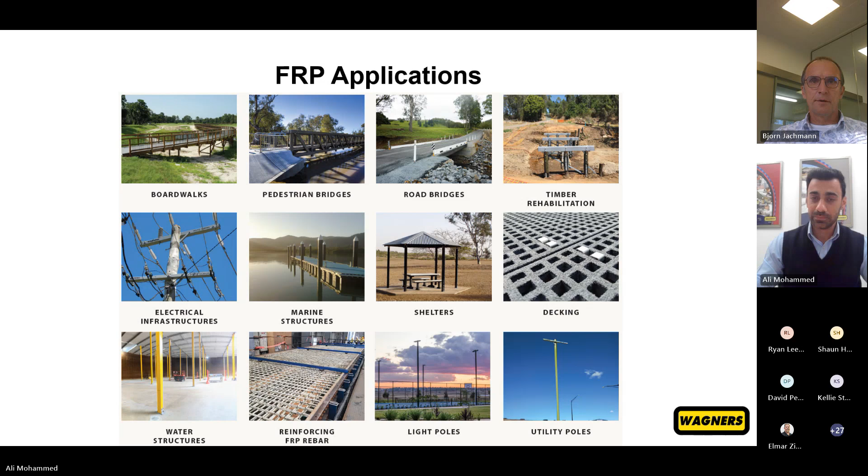When it comes to the design of FRP structures, talking about the design in general, there are two main components for the design: the analysis part and the design part. When it comes to the analysis part, the design inputs are being taken from the local standards. In Australia, taking the loads and design criteria from AS 1170, AS 2156, AS 5100. In the US, the design inputs are being taken from the local codes like AASHTO, and the same thing in Europe.

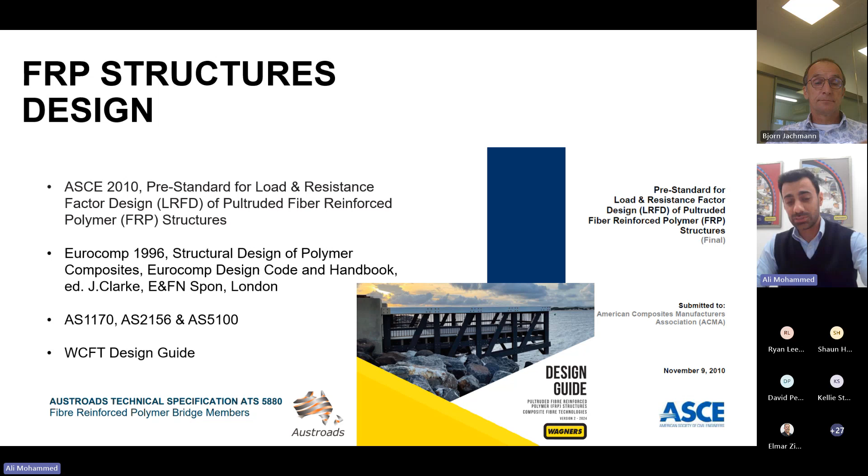These are the analysis inputs. The analysis procedure itself can be done using well-established engineering theories and first principles, like the beam Bernoulli equation theory, or Euler buckling formula, with manual calcs and/or in-house developed spreadsheets, or even using structural analysis software, like for example Space Gass. So all the analysis part is basically what we do for every other design.

The design component of FRP structures is the challenging bit of the design, mainly because there are no Australian standards. However, Engineers Australia basically allows us to refer to international standards if there are no local standards. So the international standards mainly are the Eurocomp and the ASCE LRFD. All of these design codes have been developed for commercially available FRP. And as you know, FRP is basically a very engineered material.

It can vary significantly from one pultruder to another and from one manufacturer to another. So you'll get a wide range of mechanical properties or design aspects. So what has been done here in Australia is we have developed a design guide that specifically covers the design aspects, the mechanical properties, and the structural capacities of the locally manufactured FRP.

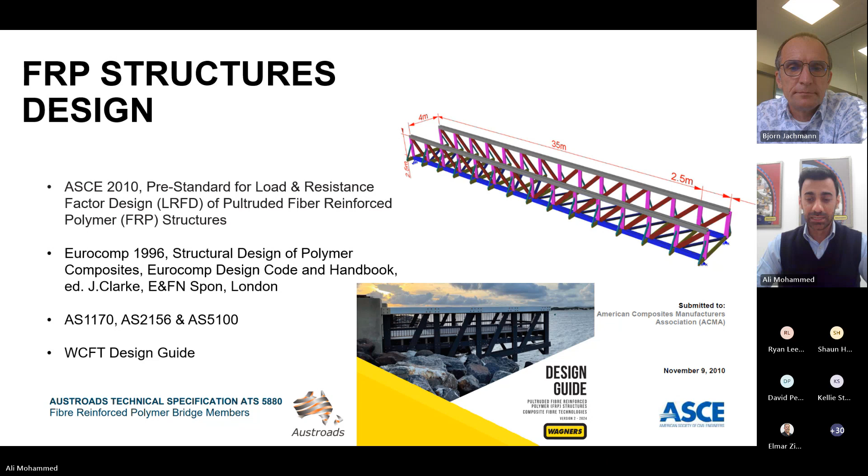So the capacities and values reported in the design guide, as I mentioned, the design guide is being developed in accordance with the international FRP codes and with the Austroads specification. All the actual and experimental capacities are taken from an extensive testing program.

So basically, we have the capacities in the design guide that can be cross-checked with the results we get from the analysis. Your M star can be cross-checked with phi Mu, considering the design reduction factors, and that would be your check for the design.

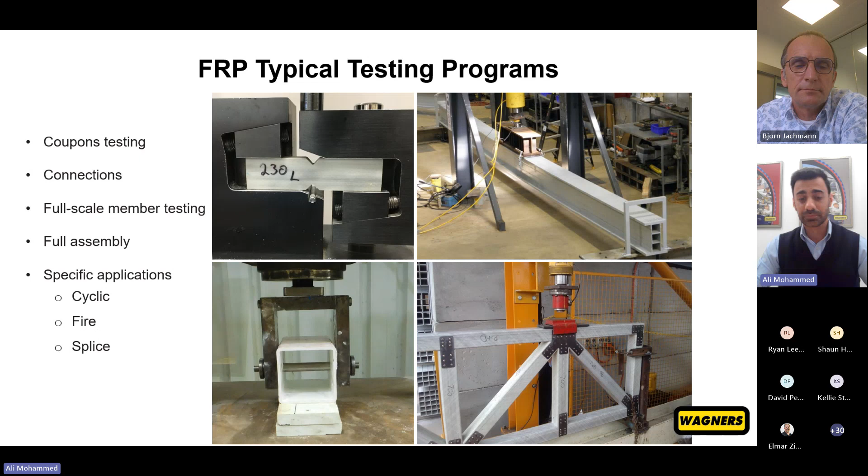Talking about the design reduction factors, all the tables presented in the design guide already include the capacity reduction factor. There are three main types of reduction factors: the capacity reduction factor, the time effect factor, and the end-user or environmental factor.

For the capacity reduction factor, if the capacity is calculated theoretically, there are specific factors for every property, whether it's compression, tension, local failure, or stability failure. This value can vary from 0.65 up to 0.9. However, if the capacity comes from an experimental test, this capacity reduction factor is calculated using a statistical analysis method, based on the number of samples tested and the coefficient of variation, which is usually less than 5% for locally manufactured FRP, mainly because of the full automation and stringent QA system. So we maintain a coefficient of variation of less than 5%.

The time reduction factor is similar to what's applied for timber design, mainly considering the type of load, whether it's sustained load during the whole design life of a structure, self-weight and dead weight of the structure, or transient load. For each of these loading conditions there is a specific value, for example 0.8 for transient load, 0.4 for sustained load, and all of these factors are taken from the international FRP codes.

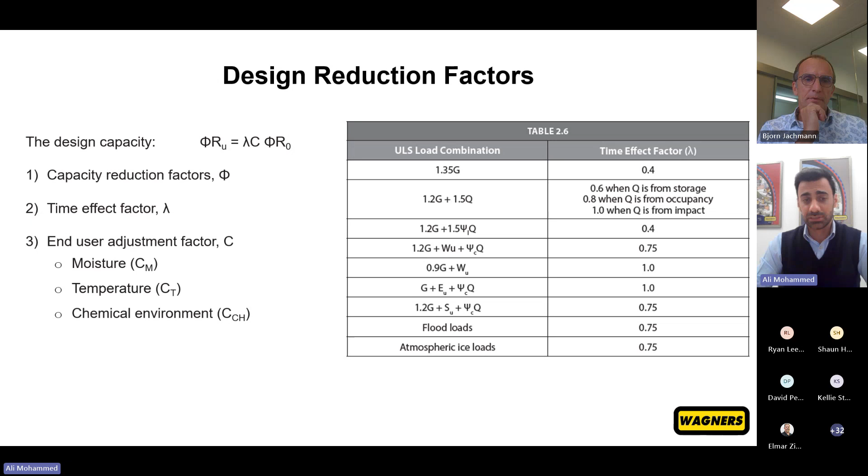The final reduction factor is the end-user adjustment factor, to account for moisture, temperature, and chemical environment. This moisture condition factor, or environmental reduction factor in general, mainly considers the type of environment and the type of material and manufacturing method used to manufacture that FRP itself. So it varies for strength and modulus, and varies for the type of resin, whether it's vinyl ester, epoxy, or polyester, and also varies with respect to the manufacturing method, whether it's filament winding, pultrusion, or hand layup. All of these factors are taken directly from the code.

The thing I want to highlight here is that these reduction factors, mainly the environmental reduction factor, are being applied at the discretion of the design or certifying engineer, mainly because these factors are taken from international codes developed for all commercially available FRP, and as I mentioned, FRP can vary significantly from one pultruder to another.

So dealing with various certifying engineers around the country and even around the globe, some of them take these reduction factors as presented here, some of them consider it as 0.9, and others consider it even as 1.0, in other words no reduction factor at all, mainly because of the durability studies and case studies we have done in the past.

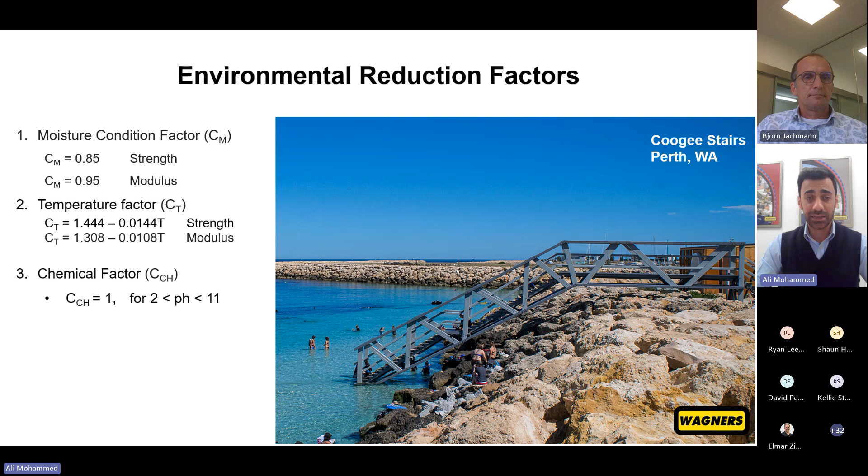So basically we have done extensive durability studies where samples were conditioned under extensive UV and moisture cycles with a specific temperature range, following specific ASTM standards, and all of these coupons were assessed before and after the conditioning.

Another good example of that is the Cameron Rocks case study, where this structure was installed 10 to 12 years ago. After 12 years in service, going through major floods, the floor bracing of this specific structure was replaced in collaboration with the Brisbane City Council. We took that sample and replaced it with a fresh sample, mainly to undertake an R&D evaluation on a sample that's been in service for 12 years.

So we took that sample back and did experimental testing on it, and the coupon test results still passed the QA pass mark we use in our system to assess freshly manufactured FRP. These QA pass marks are still higher than the actual design values we use in the design guide.

For example, the interlaminar shear design value is 44 and the compressive strength is 485 MPa, against QA pass marks of 50 and 500 respectively. The sample being tested, even after 12 years in service, still met these requirements. This gives confidence to the certifying engineer to reconsider how to apply the environmental reduction factors.

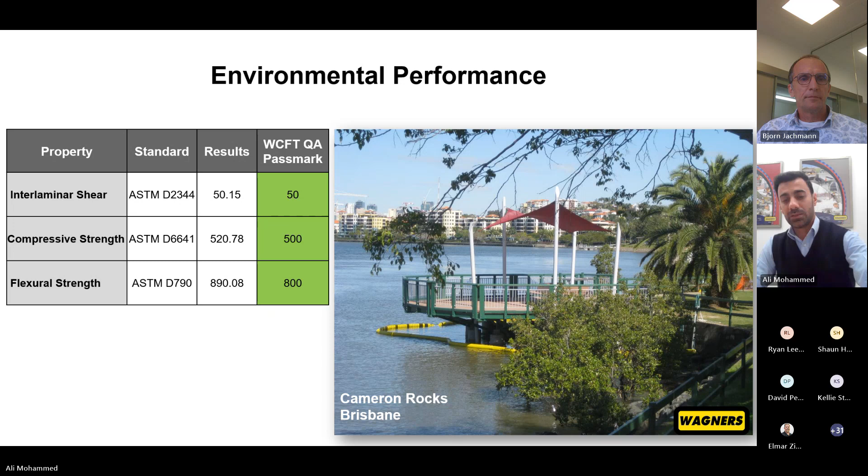The final thing I want to highlight before handing over to Bjorn is the performance of the material, or basically the behavior of the material. As structural engineers, we need to understand the behavior of the material to give us confidence and a good understanding of how it's going to behave in actual service.

With that being said, there are two key points we need to keep in mind. For GFRP, when it comes to design, considering the high strength to stiffness ratio, the design is generally governed by the serviceability limit. In other words, the strength utilization of the material is around 30% of the ultimate strength of the material.

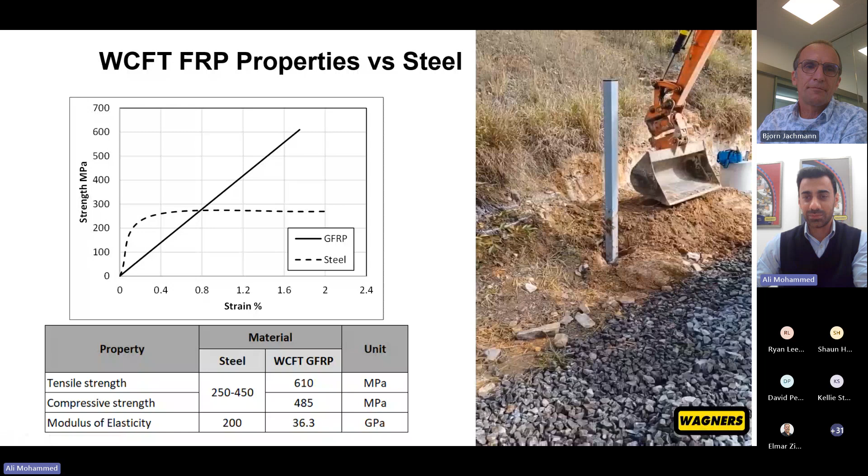So here I conclude my presentation, and I will hand over to Bjorn. I'm happy to answer any questions at the end of this webinar.

Bjorn, all yours. I'll stop sharing my screen. Yeah, thank you, Ali. That's a great presentation.

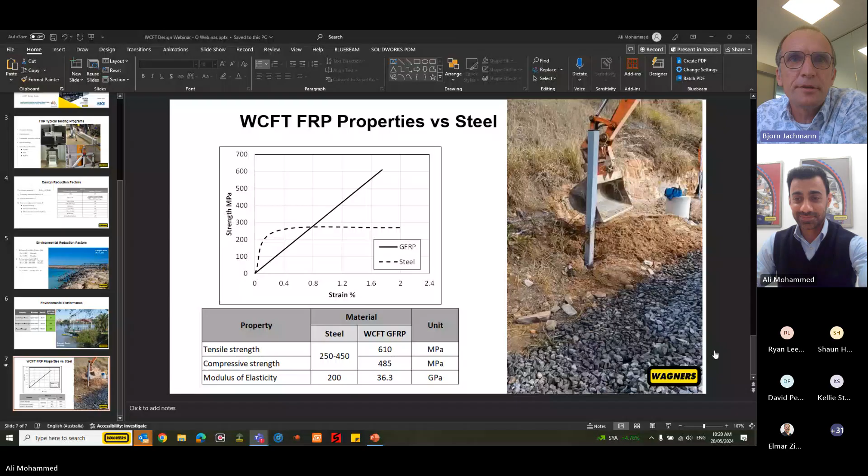I'll talk today about the Eprapah bridge, which was already introduced in the little introduction video. I'll focus on the member and connection design, and then the second part is more about the dynamic behavior of the bridge structures, which is becoming quite important for composite fiber.

As you probably saw in the last graph from Ali, the stiffness of composite fiber is much less. We're looking at 36,000 MPa compared to steel at 200,000. So stiffness is a problem. Strength, we are fantastic with composite fiber. But the lesser the stiffness, the easier a structure can vibrate.

Talking about the Eprapah bridge first, it's the longest bridge in Australia in composite fiber, a pedestrian bridge. It's 4.7 meters wide, 2.5 meter wide traffic width, and has a single span of around 36 meters. The design criteria for the bridge was at the time 5 kPa, with a 2.5 kilonewton concentrated load.

Of course, we have to consider wind loads, and we have to consider flood loadings with velocity of 2 meters a second, which is debris loading, and possibly some log impact. This is something you need to assess for each bridge design. At the time, there was discussion to lift the bridge far out of the water, so they tried to do it anyway, and they got some clearance of 300 millimeters, but they still have to consider the debris loading on this bridge. You can see in the cross section, composite fiber, it's quite...

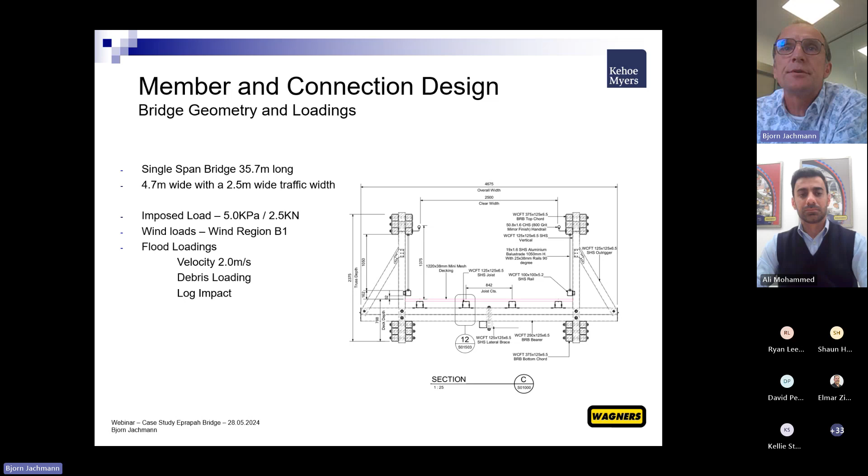Predominantly, for the deflection and the dynamic behavior of the bridge. Strength, we don't have a problem with truss bridges in composite fiber. So this is the elevation and the layout plan of the bridge.

You can see on the layout there are some horizontal members which are required for the flood loading, debris loading, and it will help us as well to control the side sway of the bridge when people are walking over it, and we'll talk about that later on.

You can see on the elevation there's actually a dotted line shown at the bottom that shows you the elevation of the flood, and there's a 300 millimeter clearance to the underside of the bridge. However, the clearance is not enough - you will get some debris loading. So debris can catch the bottom chord of the bridge, and it will cause some significant horizontal loading on that bridge.

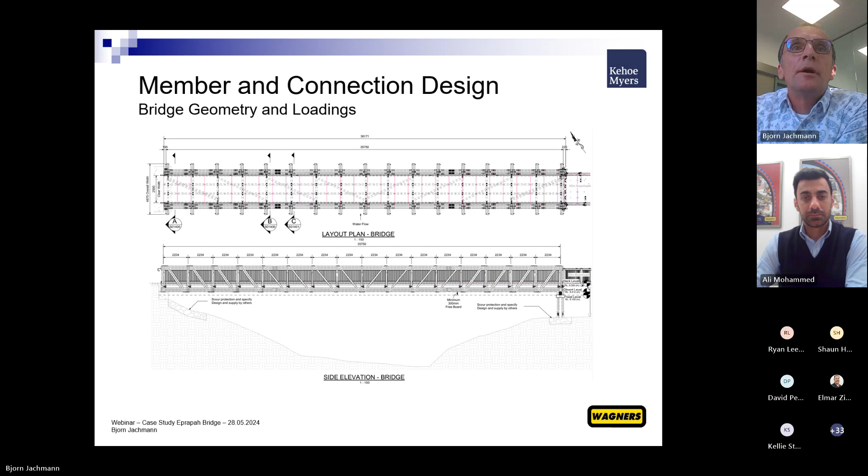Typically when designing these bridges, you're using programs - Ali mentioned that before - like Space Gass, and you can see in the model, I'll probably put two snapshots in there, it's pretty much reflecting the same cross sections, and the program considers quite well the E-modulus of composite fiber.

For truss bridges, I have to say, if it's a beam structure, you have to be careful because of the deflection. What this program doesn't consider is deflection coming from shear. It doesn't matter much for composite fiber because it's probably increasing the deflection roughly by 5%, which doesn't sound like a lot, but it makes the material a bit softer. You should always be aware of this property which we need to consider.

When we do the design, that's no secret, you're looking at your ultimate forces, and you can see on this graph the compressing force at the top chord is 941 kilonewton. The ultimate tensile force at the bottom chord is nearly the same - it should be the same, there's always a little variance. And you've got even some tensile forces on the top chord and some compression force on the bottom chord.

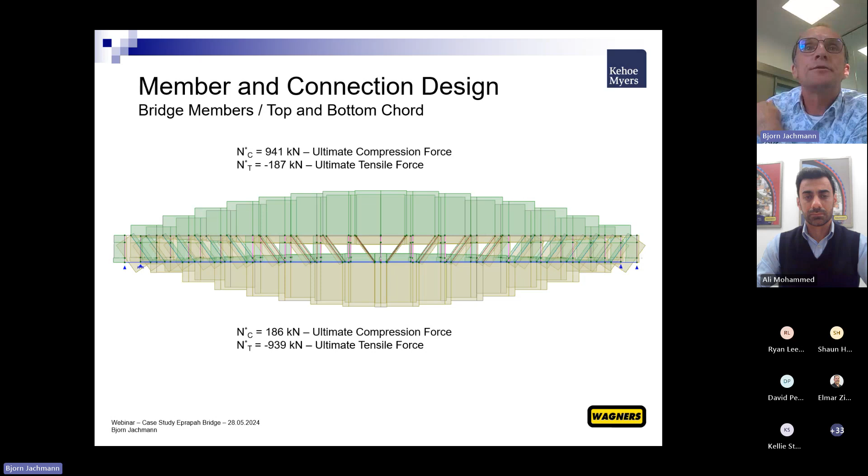We used Space Gass, and it gave us a buckling length of 5,920 millimeters, considering the stiffness of the verticals and the stiffness of some propping. I can go back to where I showed the propping on the side here, these members here, so you don't get a sudden failure of the bridge when it's fully loaded.

There's actually two areas you need to check. One is the serviceability of this one, and using formulas which are well known, you can work out the minimum serviceability load of 1,500 kilonewton.

When you look at the ultimate design code, I've only touched base on this one. There are a few reduction factors in that as well. There's lambda, which looks at the time when the load is applied. Then there's the C factor, which talks about the environment, so what things you need to consider in that design. You work out that we actually have a capacity of 1,428 kilonewton compared with the compression force of 941. So we've got a lot of, let's say, redundancy in terms of strength.

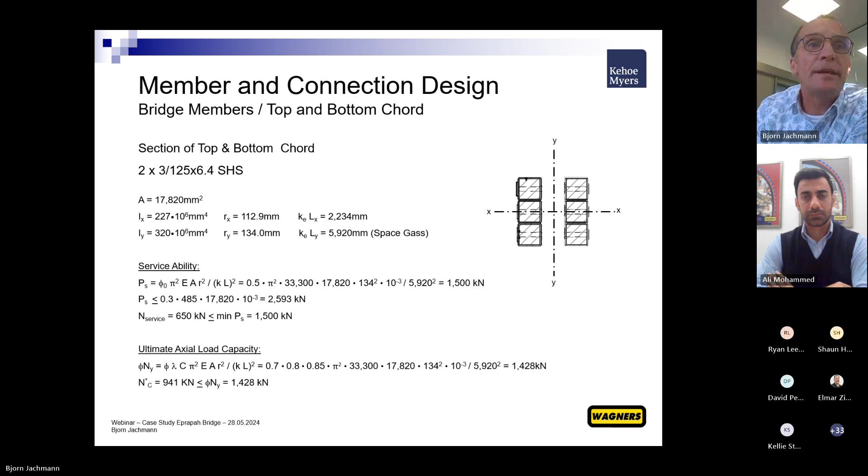You do pretty much the same thing with all these members. I want to show you how you design the connection of the diagonals in the truss bridge. You see the diagonals, especially at the end, the highest loaded one, not surprisingly, have 6 bolts, 6 M24 bolts, in that connection.

Because it's a double shear, you jump into the design guide, the old one, and for the M24 in double shear you get 64 kilonewton per bolt. With 6 of them, you get 384 kilonewton capacity. This insert is non-glued, so the overall capacity is 384 kilonewton. The design load was 368 kilonewton, so we are pretty much fine with this connection. I can probably say we need 6 bolts in there.

The member itself, the diagonal member, is a 250 by 125. It would probably be fine with just a single member, but because of the limitation coming from the connection, you end up with 2 members at this connection here.

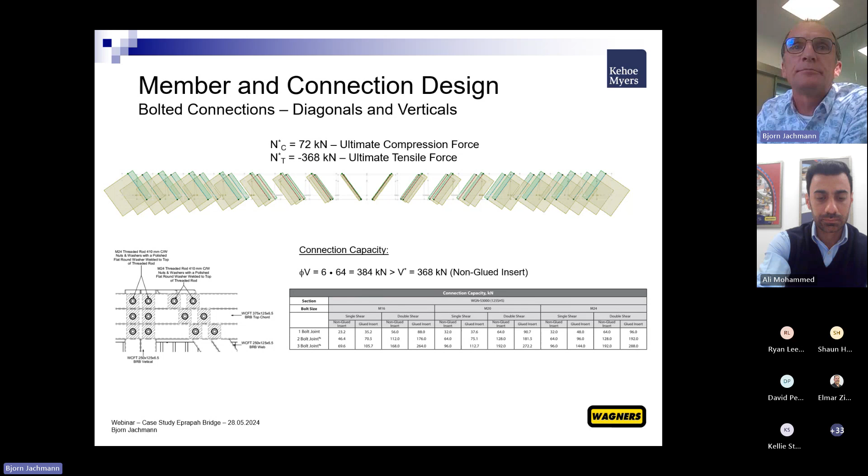Because of the length of the bridge, which is around 36 meters, and the access, there were splice joints required, because the road was pretty narrow, so you had to break up the span of the bridge into 3 elements, pretty much equally spaced. I marked the joints here where they are, so 36 meters divided by 3, they're probably 12 meters long each.

We actually worked with the splice joint using rivets. They're very effective using rivets, and you can see there's a lot of them in there, which is a lot of work for the guys on site, but the strength of this connection is, I would say, even much better than the bolted connections.

One thing to consider is the rivet connection, especially at the top chord. There's a lot of axial load in it, compression, so there might be a possible failure from buckling of these connection plates. The connection plates are 5 millimeters thick, each side. Again, Wagners did a lot of tests, so we know what the capacity of the plates is, and there's a heap of capacity in that connection. That's the last thing that will fail in that design.

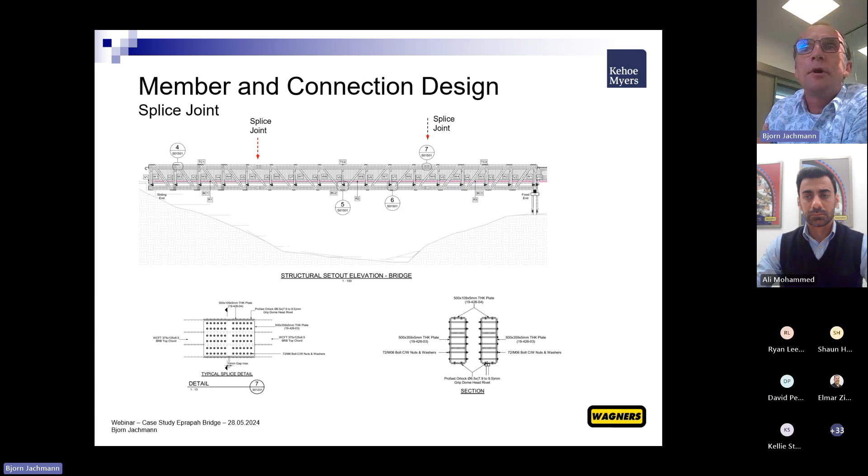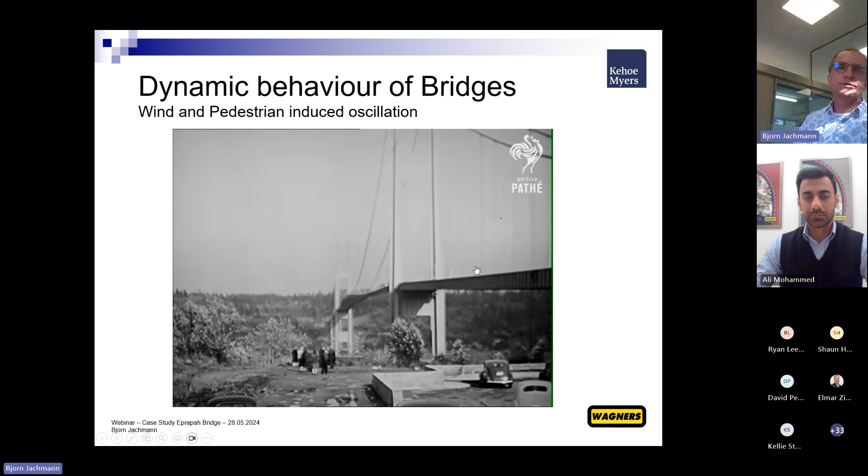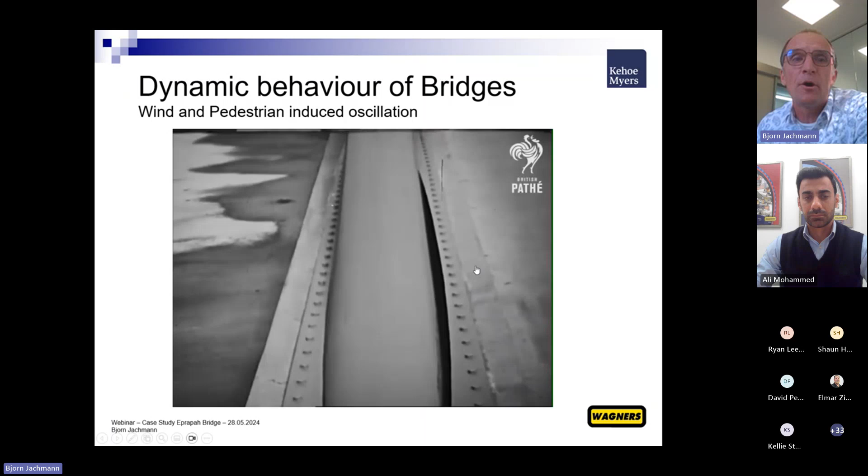It's actually the Tacoma Bridge, which was constructed in 1940 in the US. It was crossing this bay, and during construction, they already noticed there was a lot of sway going on in the bridge structure. On a particular day in 1940, there was consistent wind around 60 to 65 kilometers an hour, and the bridge started to sway.

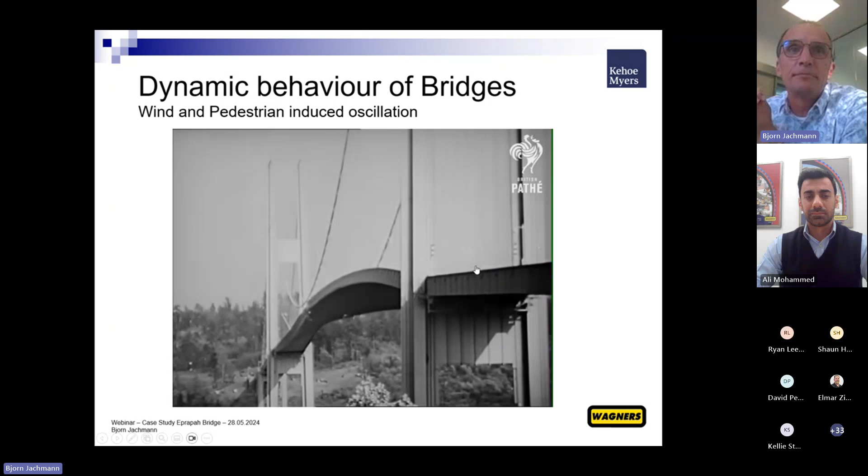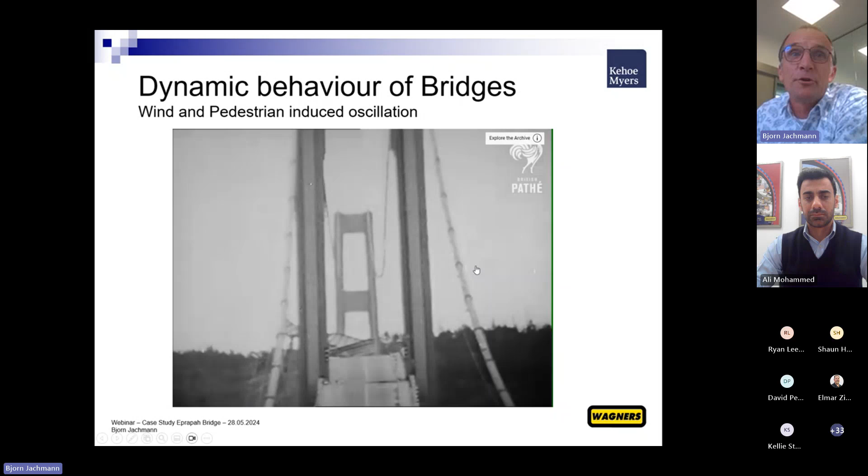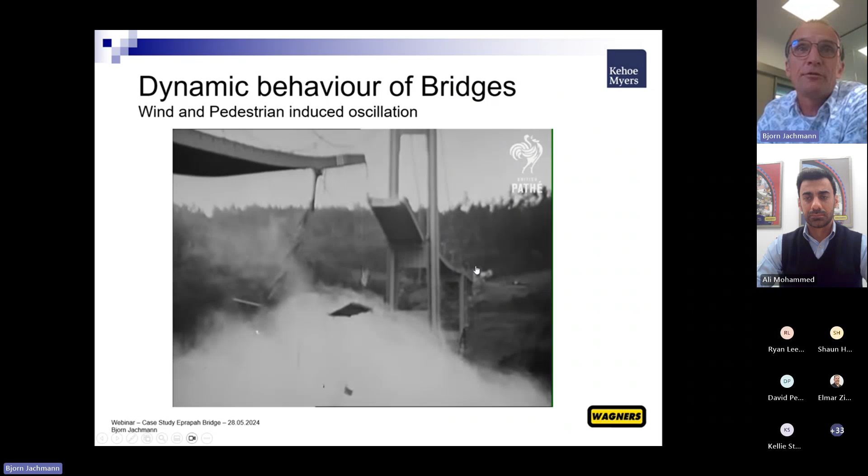You can see in that video how significant this sway was, and that was never experienced before in that world. Local newspapers came to the site. One guy parked his car on the bridge, which is quite extraordinary, then just walked away, you know, like it was nothing. But you can see what happened later on: the bridge actually collapsed under a wind load of just 60 to 65 kilometers per hour. Nobody ever thought that would be possible.

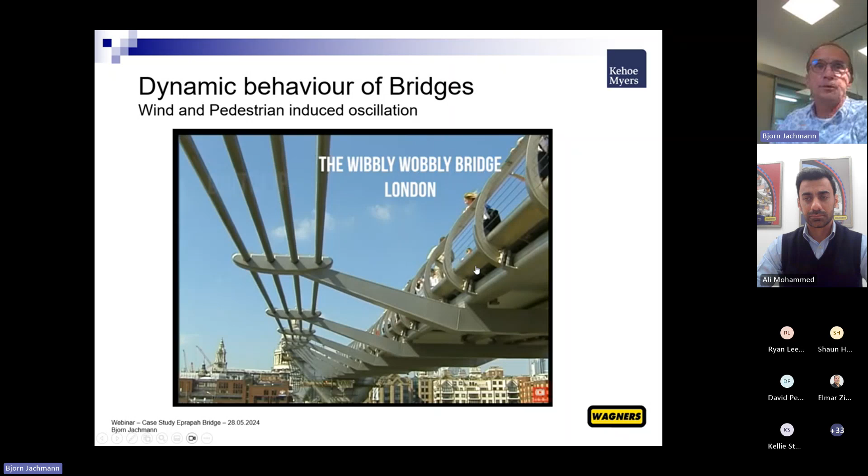There are other means of sway for bridges, and I want to bring up the Millennium Bridge in London. It was opened in 2000 to the public, and you can see on that video people walking over the bridge straight away, and it was swaying sideways.

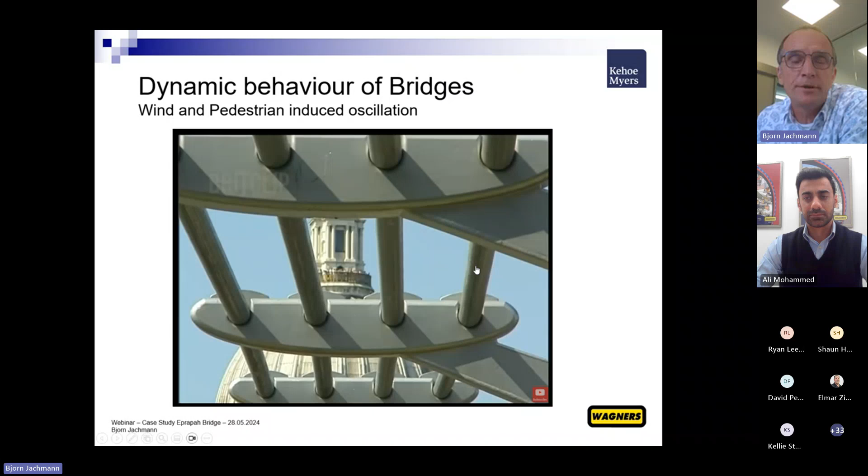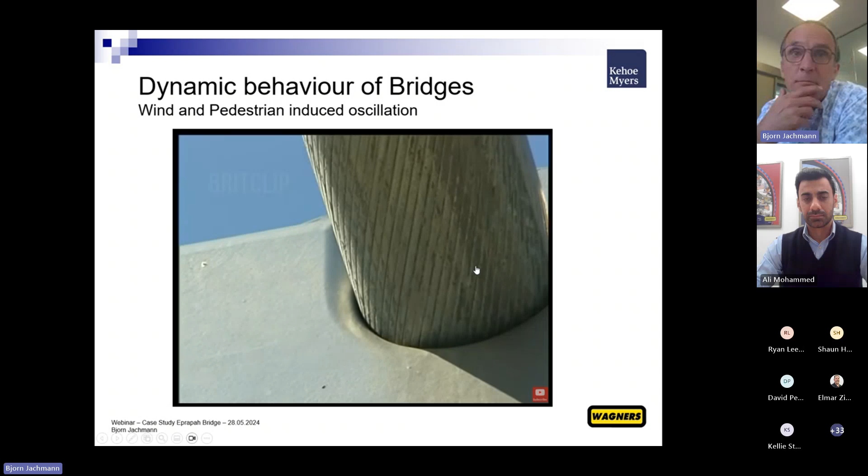Never watched before on a bridge structure. It was a very slender structure anyways, and actually designed by Sir Norman Foster. And all the engineers, the architect, were very surprised what's going on there. So it was quickly named the Wobbly Bridge by the locals, and they had to shut down the bridge 2 days later, it was too severe.

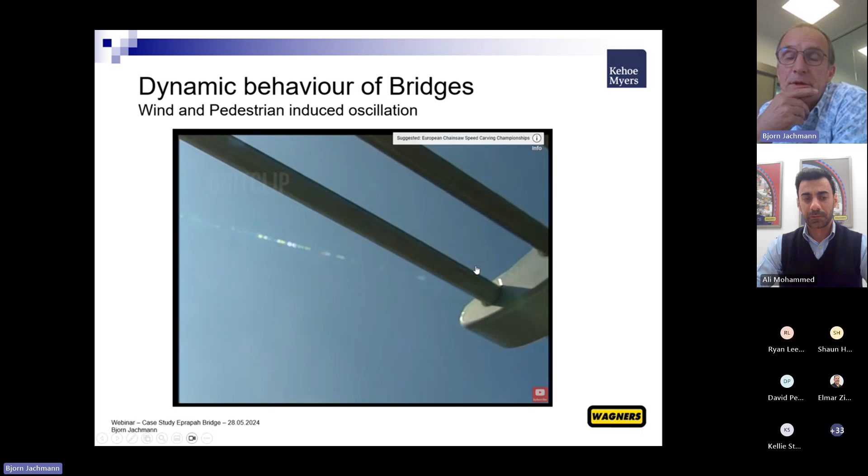They shut down the bridge to the public, and said we need to improve it. What they actually did, they talked to a few smart engineers. One of them was based in Germany, this Professor Petersen. And they designed some shock absorbers they later installed in that bridge.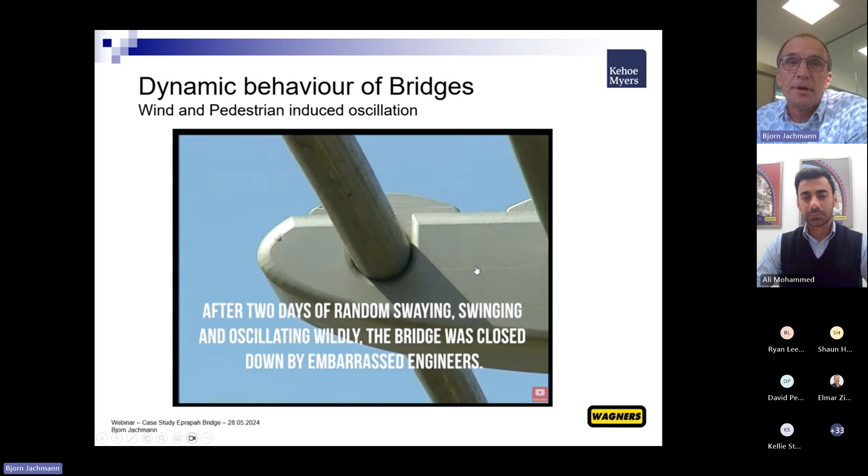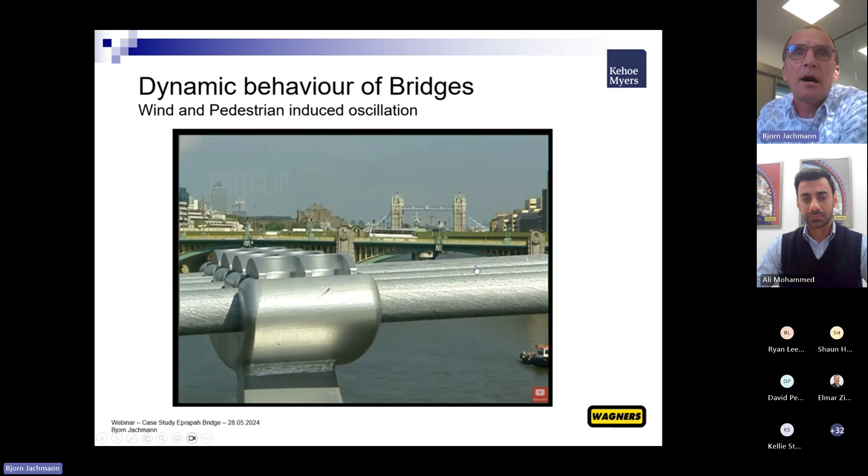But the whole rectification work took them 2 years to get that under control. And they got it under control since they installed the shock absorbers, and I think there was more than 60 of them along the bridge structure. It stopped swaying, so people walk over it and don't get this pretty uncomfortable feeling. You see now, after they rectified the problem, people walking off the bridge, and it stopped swaying.

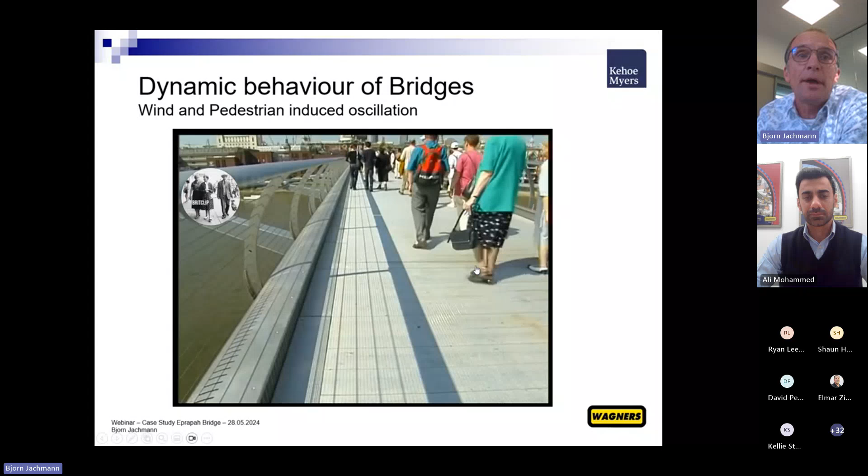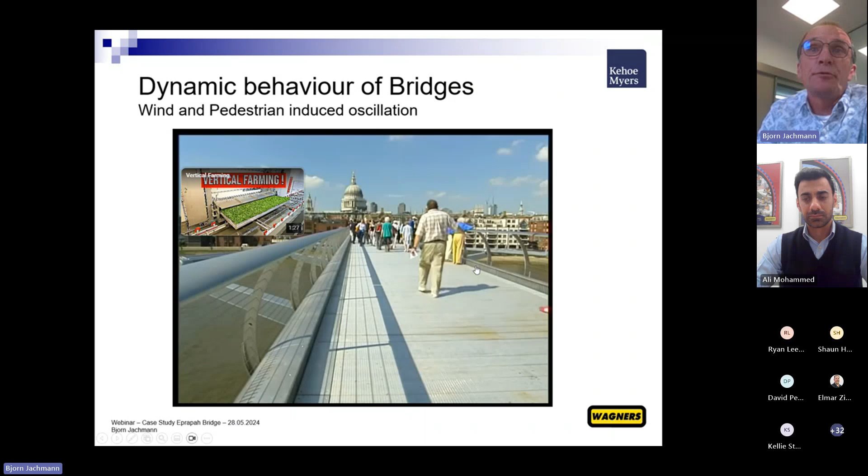But we don't want that to happen to our bridge. So that's why we want to dive in a little bit into the dynamic behavior of bridge structures. First, we have to understand what it means when people walk over the bridge.

So this is roughly how the characteristic looks like when a pedestrian walks over the bridge, and that's the sort of vertical forces they're inducing into the bridge structure. This is for a person with a body weight around 71 kgs. You can extrapolate it if it's 80 kgs, all the numbers go up.

People typically walk with a frequency between 1.5 and 3.5 hertz. That actually depends how tall you are, and a little bit on which country you're in. Smaller people walk with a higher frequency than taller people, so that's a little bit different. But because they're smaller, the forces inducing into the structure are actually a little bit less.

You can see on this graph here, this, for example, might be the left foot - if you could see my cursor - and this is the right foot, and so on. So it's a little bit of a wobbly characteristic for the vertical loading. And if you're in this critical frequency, 1.5 to 3.5 hertz, with your bridge structure, you have a problem. You have to look at that a little bit closer.

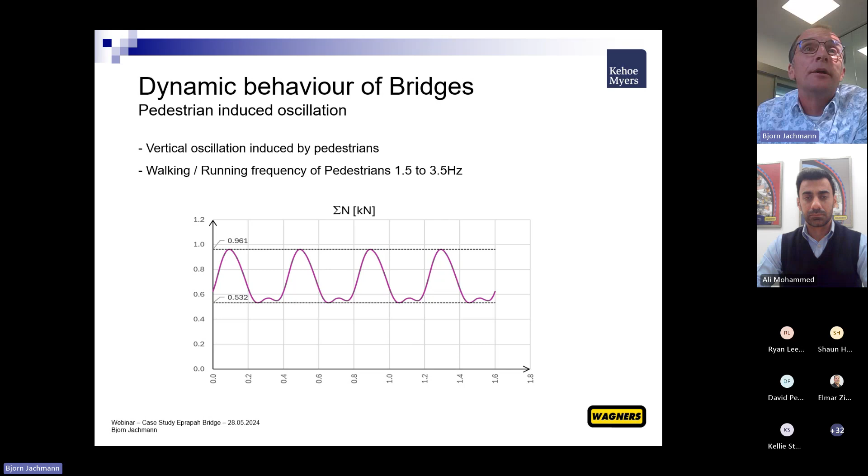So when we did that for the Eprapah bridge, we used a few methods to calculate the frequency of the first mode of this bridge, which was actually 3 hertz. So we are in that critical area. Actually, the bridge code AS5100 says if you're below 5 hertz, you should investigate further what that means for the bridge, how it behaves under pedestrian loading for vertical resonation. And the second mode was already at 8.2 hertz, so we're well above the 5 hertz.

If you look at the figure of how the bridge will sway, you see it's an easy way to get the bridge to sway in the first mode. It's getting much harder to get the bridge to sway in the second mode, because you need to get the people to work together - you have to apply the forces on the right side of the bridge, but then take away the forces on the left side of the bridge. But it's very unlikely that will happen. You can't rule it out though, and I will show later a video that it's actually possible.

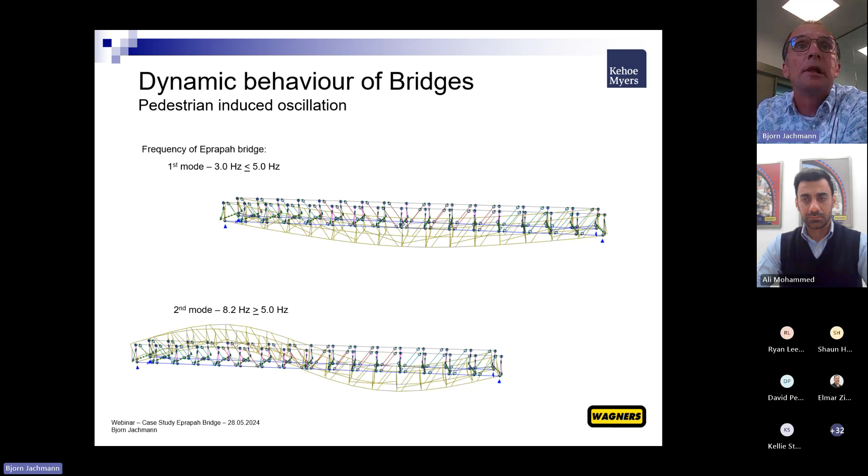If you have to change something on the frequency, if you want to get it lifted out of the critical area, you can change the I value with some things potentially. But if you're increasing the mass, you're actually decreasing the frequency. So of course, if the bridge is longer, the frequency will drop. So whatever you're doing on the structure to modify, you have to understand what you're doing and what it does to the structure.

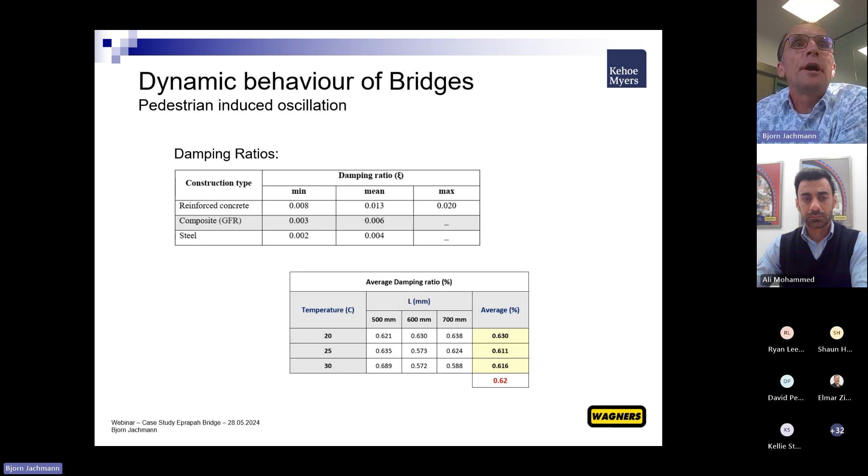What this damping ratio actually describes, if I jump back, is the ratio of how much the frequency, the swinging, will actually decrease from one swing, let's say.

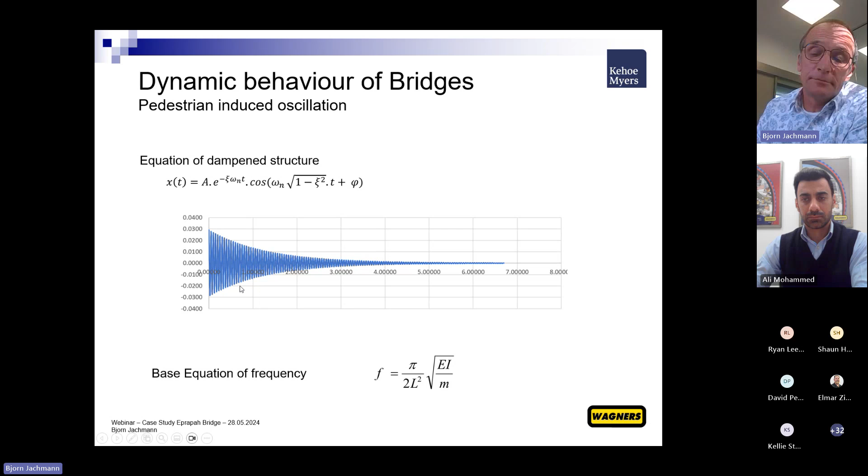So now we're looking into the bridge code. The bridge code gives you some guidelines on how to calculate your maximum acceleration, because that's what you're saying, oh, that might feel uncomfortable. There's a formula in the bridge code you can use.

I've used it for Eprapah bridge, and we worked out there's an acceleration, a maximum of 1.6 meters per second squared. That's what we worked out using the bridge code's formula. The allowable acceleration, according to the code, is actually 0.59 meters per second squared. So we're well above that.

So of course, then we have to dive a little bit deeper into this whole design and say, okay, what is it really? You can dive in, and I use the formula which is very commonly used for investigating this structure. P naught is pretty much the force exerted, provided by the pedestrian. K is the stiffness of the structure. Beta describes the ratio of the frequency of the bridge and the pedestrian walking over it. And zeta is the damping ratio.

Based on that, there would be a maximum oscillation of plus minus, let's say, 2 millimeters in the center of the bridge. It's not a lot. The velocity is just 0.04 meters a second, also not a lot. The acceleration based on this is 0.67 meters per second squared, so it's a little bit higher than what the bridge code would recommend.

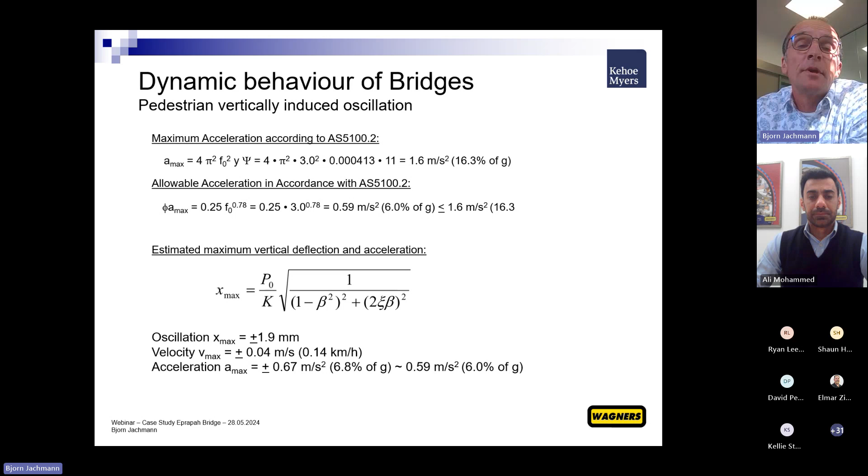The second thing is, of course, the horizontal sway of the bridge. Typically, if a person walks with, let's say, 2.5 hertz over the bridge, 1.25 hertz results into horizontal sway. That's what they actually found out when they investigated the Millennium Bridge, because before that, they never really looked at that. It was never a problem.

The characteristic of this horizontal sway is very different, and people walking over bridges start swaying horizontally, they walk like what they call the seaman walk, because you try to balance it out. And while you're balancing it out, you're actually increasing the sway because you're applying more and more forces on it.

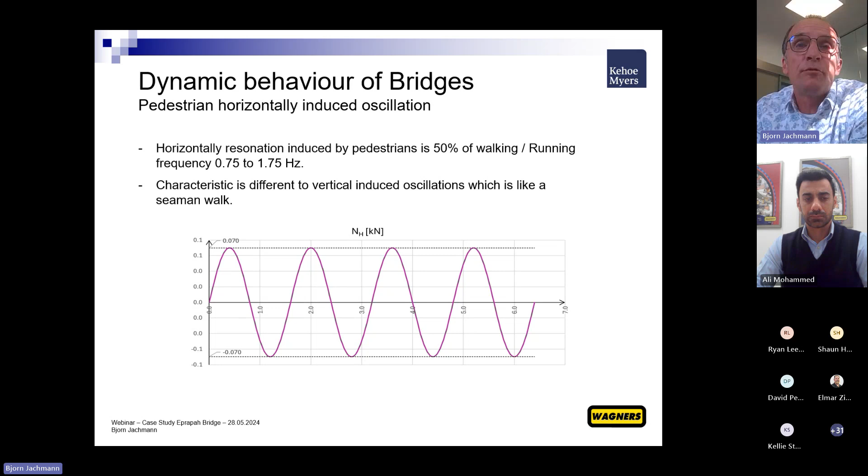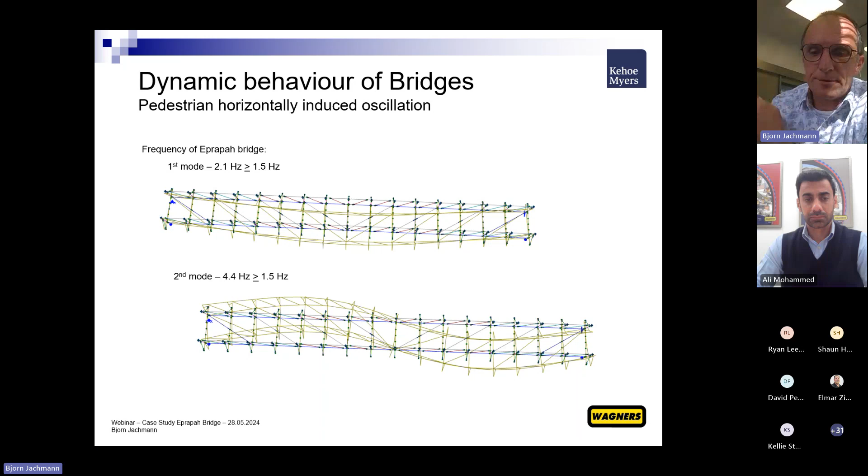Of course, we looked at the horizontal frequency as well, which is actually 2.1 hertz, higher than 1.5 hertz, and that is recommended by the bridge code, AS5100. The second mode is 4.4 hertz, so it's well above. Yeah, we are safe in that regard.

However, I looked again at what would be the oscillation, the velocity and acceleration of that bridge horizontally with people walking over it. And it's very, very minor. You see it's plus minus 0.3 millimeter, which is literally nothing. Velocity is very, very small. Acceleration, you probably don't even feel that. It's just some horizontal sway happening on the bridge.

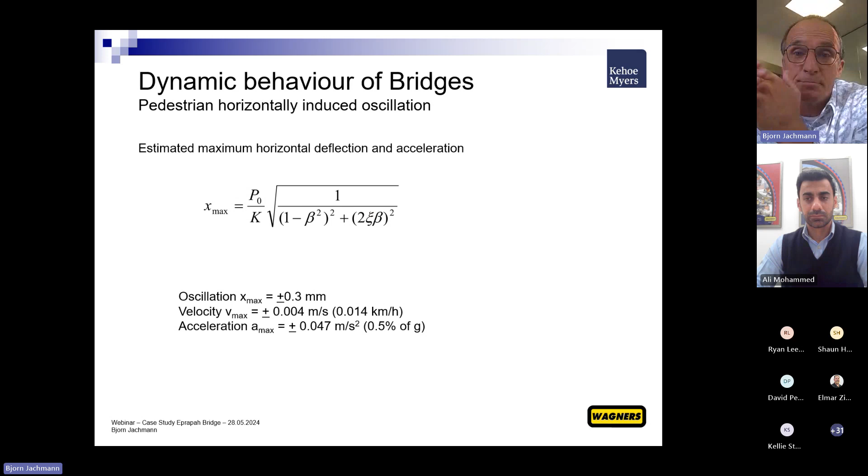So it sounds very theoretical about the sway, but remember the videos I showed of the Tacoma Narrows Bridge and the Millennium Bridge. It's possible, but there's another video, just a short one I want to show you. It's actually of a bridge somewhere in the States.

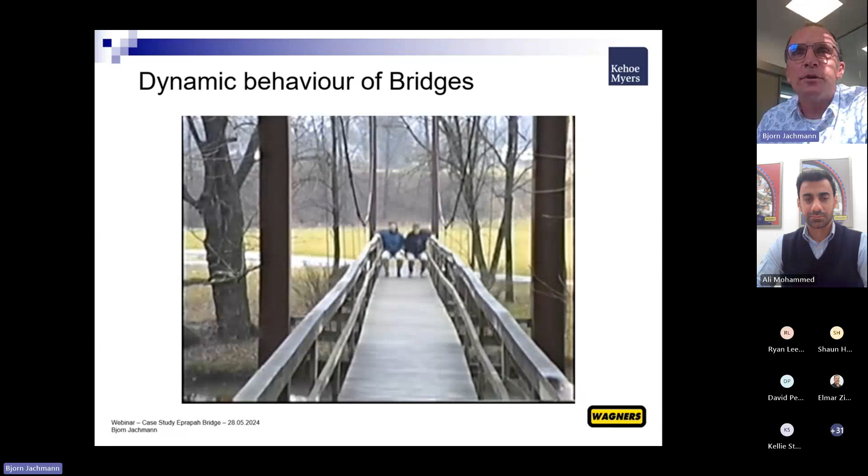I don't know where it is, but this bridge can sway a lot from pedestrians, and people actually do it on purpose, walking over the bridge trying to get it to sway. You can see how it sways. You see the young guys having a lot of fun with that. This is what we don't want to happen to our bridge, and I don't think our bridge in Eprapah will respond like that, but you can see how much it can sway, and that's what I call uncomfortable. You see this guy walking, jumping on the bridge, he's actually enjoying that. I'm not sure I would enjoy that much. I'd be worried about the structural integrity of the bridge, but you can see how much it can sway, and he even gets airborne.

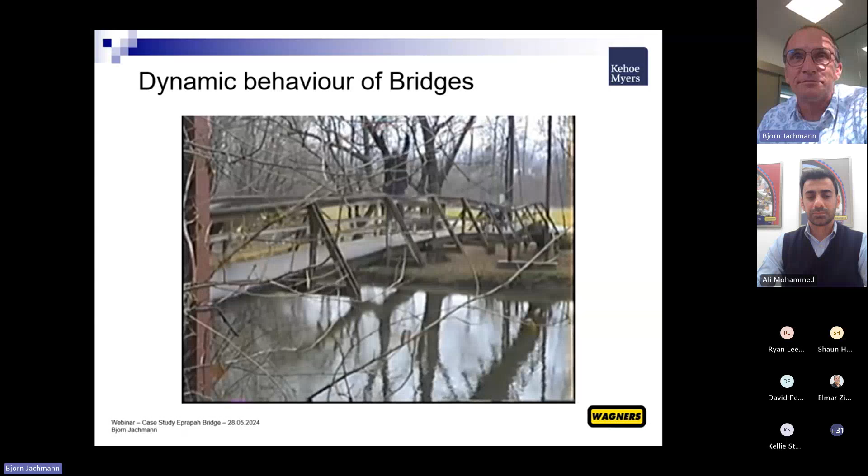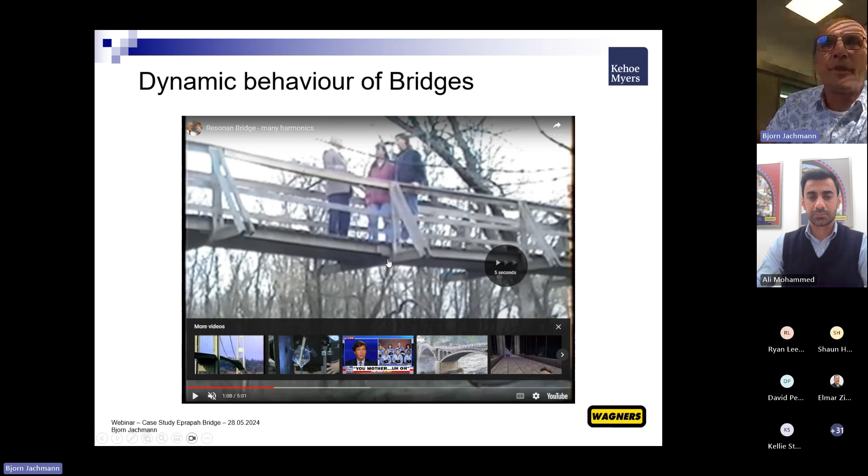I want to stop that because this video goes on for a while and they're doing all sorts of crazy things with the bridge. I want to say thank you for attending, and I'll hand over to Kellie.